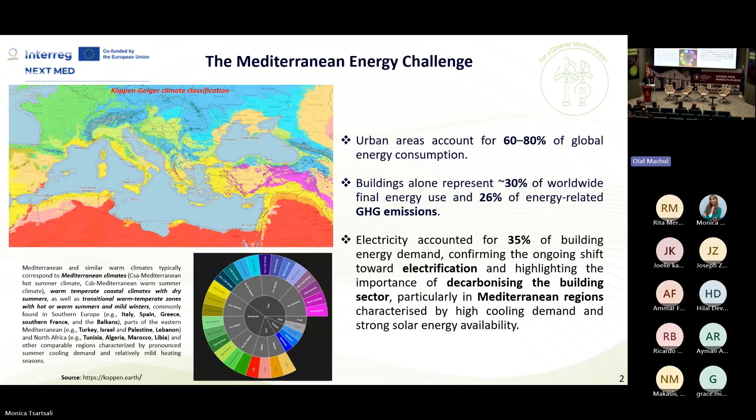The challenge that Shadi told us before of the European Union is to use the thermal energy that we have in particular countries, which are the ones with the climate, which is a Mediterranean climate. So we want to store this energy that usually in summer we cannot use because we have not the final request. You can see all the countries with hot summer, and so the possibility to use this heat.

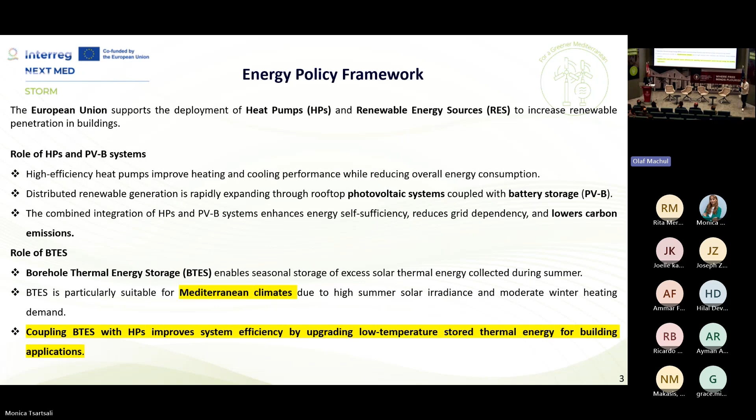So the idea of the European Union, the challenge, is also to couple two kinds of systems, the Borehole thermal energy system, also with heat pump, in order to have a polygeneration system, maybe which can reach a standalone system, a renewable energy system. This is the idea of our project, of our pilot.

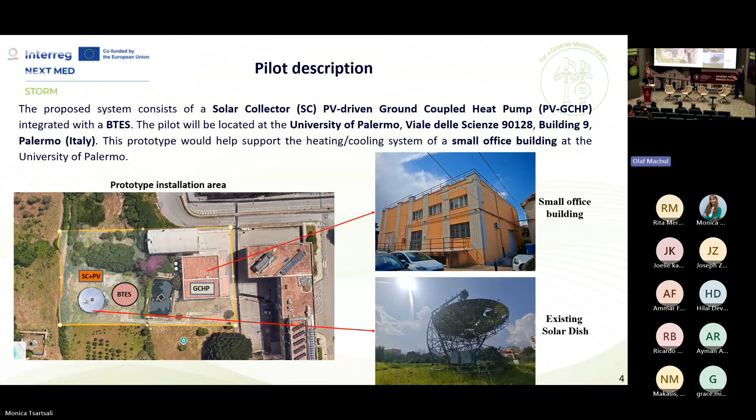Just have an idea of our plant. First of all, we have the solar collector, and we will see later exactly the shape, the kind of solar collector. Then we have a first thermal storage, which is outside of the soil, which we need to decouple the thermal storage from the Borehole thermal energy storage.

Then we have the Borehole thermal energy storage, a system with a depth of about 15 meters. It's different from Beirut because we don't want to reach the aquifer. We studied the soil of the University of Palermo, and we cannot go over 15 meters.

Then we have the heat pump. It's a water-to-water heat pump. It's hybrid because on the primary side we can work with water and also with air, because we have better conditions using air in summer in terms of COP of our heat pump. Then we have another thermal energy storage, an external thermal energy storage. Also this one is used to decouple the heat pump from the building, and then we have the building.

The setup of the building, we want to reach a temperature of 20 degrees in winter, about 25 degrees in summer. And the idea is to reach about 45 degrees for water which goes to the heat pump, which goes to the Borehole thermal energy storage, and about 7 degrees for the cooling system.

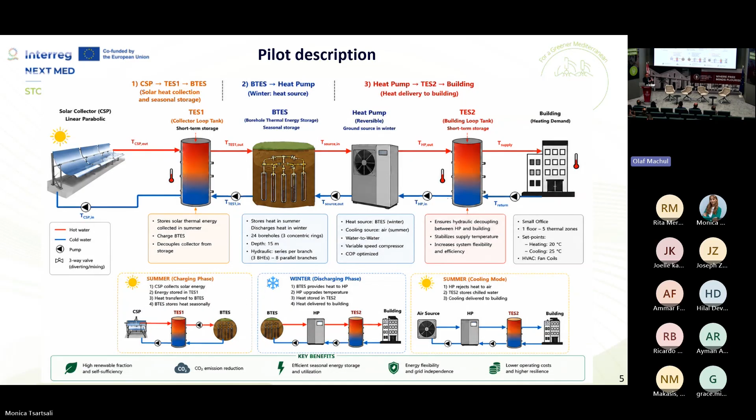Then in summer I use the heat pump to cover the final user's cooling demand, using another heat exchanger, because I want to exchange with air, since the air temperature outside is better than the water which comes out from the Borehole thermal energy storage. So this is the main idea of the management of this pilot.

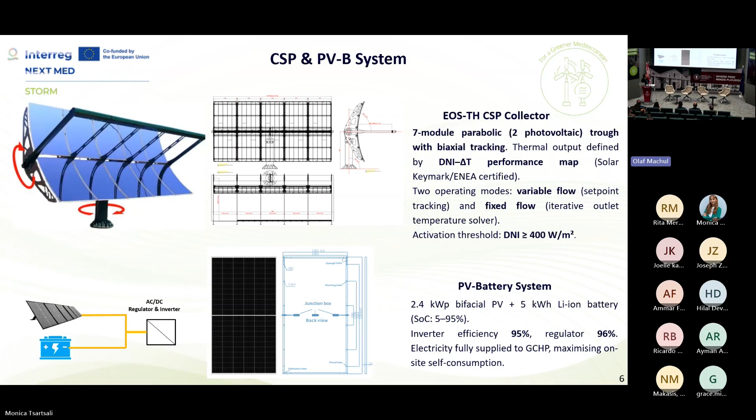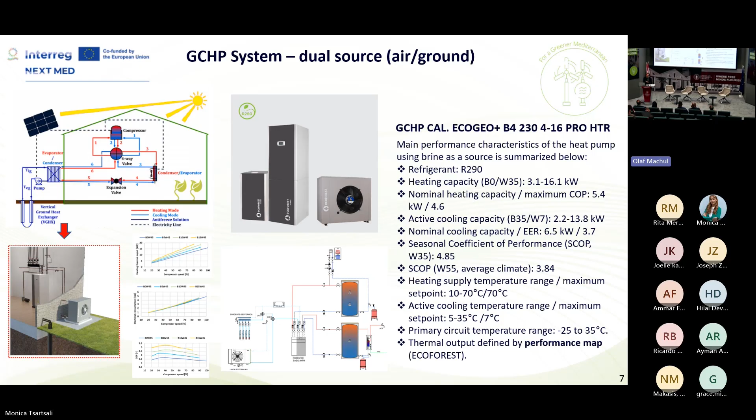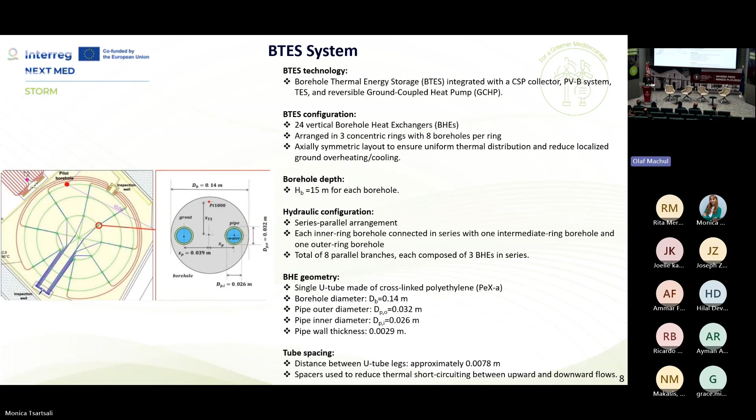Okay, this is the Borehole shape. All of us discussed about the hexagon shape. We have already realized one Borehole thermal energy storage at the University of Palermo. It's very similar, 15 meters deep, and we also studied it for 2 years. So for this technology, we are sure to have no surprises in these terms.

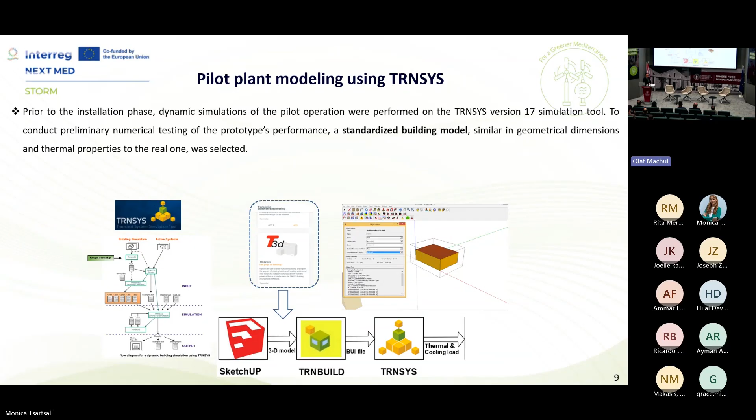Okay, we also used TRNSYS for the simulation of models. Also, Antonio Rosato from Naples and Giovanni Ciampi gave us a hand in this field. And this is the building that we study.

First of all, we study a standard building, which is very similar to our building, because the idea is to study exactly our building in the next research scholarship. The girl who won will study exactly our building, but it's very similar.

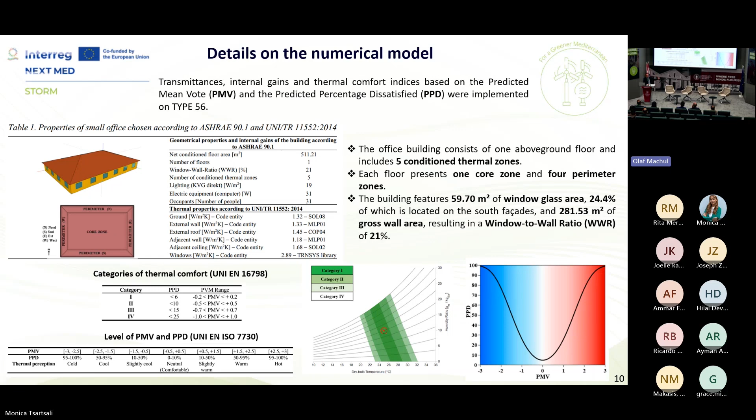We divided it into 5 zones. 4 are on the perimeter zone and 1 in the center, the core zone. And you can see the condition of windows and walls is very similar to buildings in Sicily for office use, very similar, as I told you, to our laboratory, our acoustic laboratory.

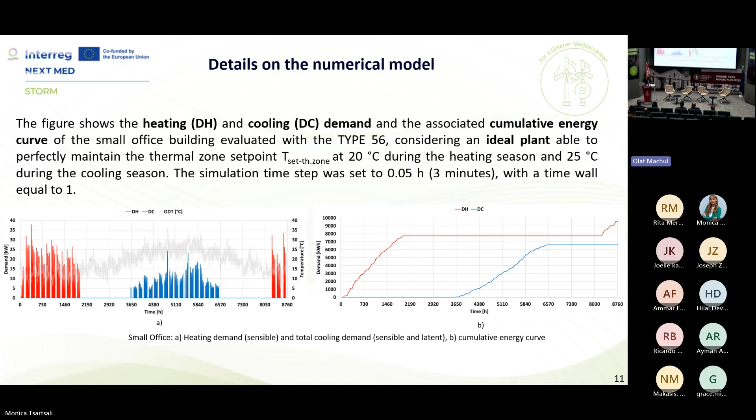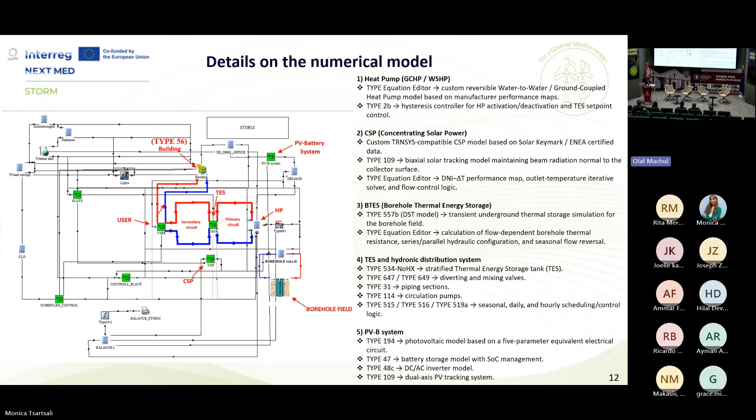Okay, let's go very quickly to the TRNSYS model. These are the different types that we put inside with all the systems, the Borehole thermal energy storage, the solar collector, and so on. Okay, just have an idea of the parameters that we study for each system.

We use for the solar collector the direct normal irradiance in Sicily, and we use the Meteonorm system in order to have a direct normal irradiance, and also the different temperature between the mirrors, the temperature on the mirrors, and the temperature of the air, which is very close to the mirror.

Then we have also a battery in order to store electricity, which is enough to cover the heat pump on some days. Then we have the heat pump.

The heat pump, we focus attention on the speed of the compressor and also two different temperatures, the temperature of source and the temperature of the water which comes out from the borehole. The temperature of source, which can be also the temperature of the external air in summer, when I prefer to use it in order to increase the COP of the heat pump.

Then we have the storage tank. I told you about the level of temperature of 45 degrees when we want to charge the Borehole thermal energy storage, and also the cooling temperature of about 7 degrees when the water goes inside the borehole, and then the condition of the building of the small office.

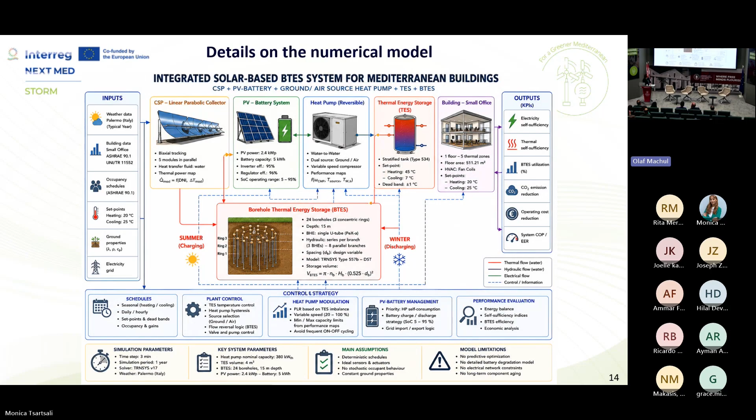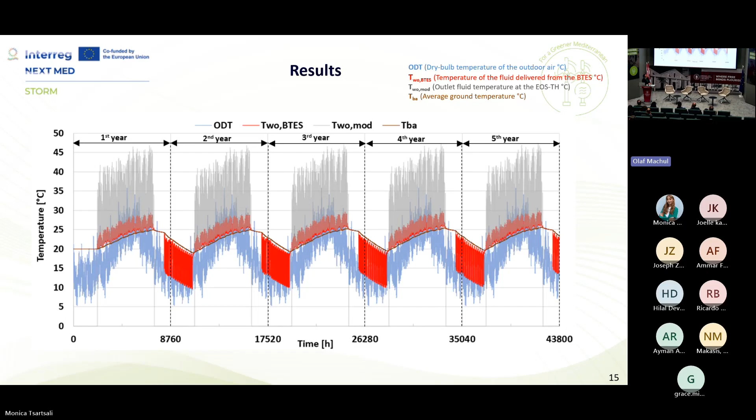So we wanted to continue the model with TRNSYS, our study, our management, in order to shift up this curve. Some information that I've already covered: we have the phase of discharging from December to March. We have the phase from April to October to charge. This is usual for everybody.

Important information: the thermal energy we collect inside the Borehole thermal energy storage is about 15,000 kilowatt-hours per year. Our Borehole thermal energy storage cubic volume is about 1,300. I saw that yours is about 1,600 more or less, but you have 100 square meters of solar collector.

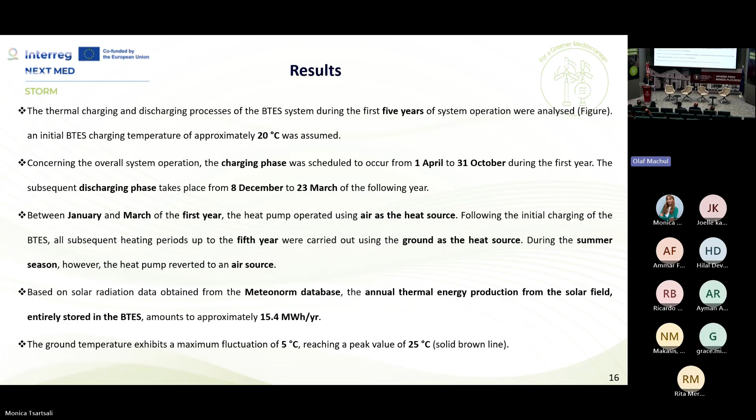Our solar collector is only about 26 square meters, much smaller, because I have to use money to cover the solar collector, heat pump, battery—this is the first pilot. You told before, this is a pilot, okay? We study, then we want to implement maybe for industry, okay?

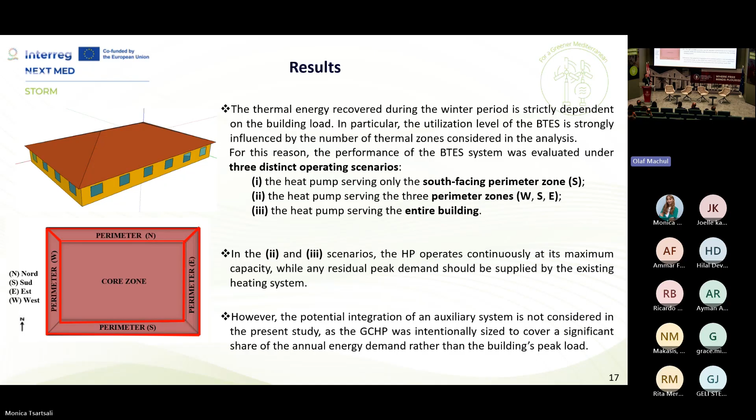This is the result, and it's important to underline that we referred only to one zone, and the result is for only one zone. We'll see that we use the Borehole thermal energy storage better if I cover all the building. So we'll see three scenarios: the first related only to this zone, the second with three thermal zones, and the last for all the building we're simulating.

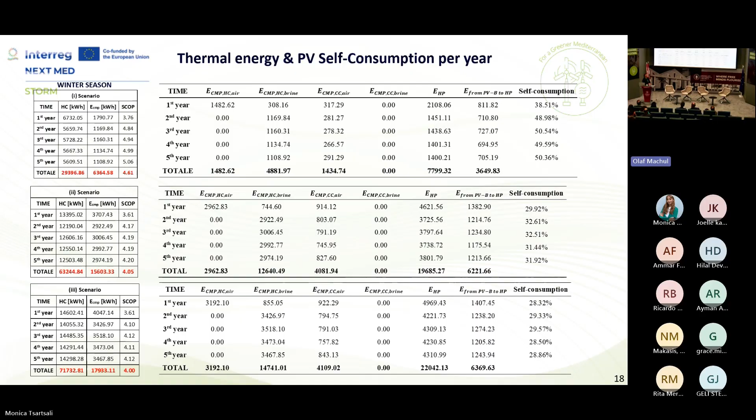This is a simulation we've done maybe last night in order to see the thermal energy we recovered, and the electricity that we use from the photovoltaic system in order to supply the heat pump.

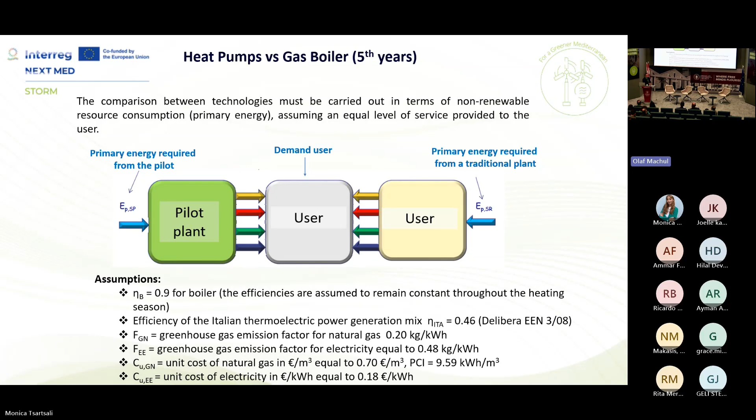We will also make a comparison between our, we can say, trigeneration system, with a traditional one, to cover the same demand of the final building. So you can see the kilowatt-hours of energy saving compared to the traditional one, and also the cost saving.

The cost savings are very small at the moment, maybe because we have to shift up and go on with simulation, but it's important to underline that we can have some energy saving. We also did this for the first scenario, for the second with three thermal zones, and the last with all the zones.

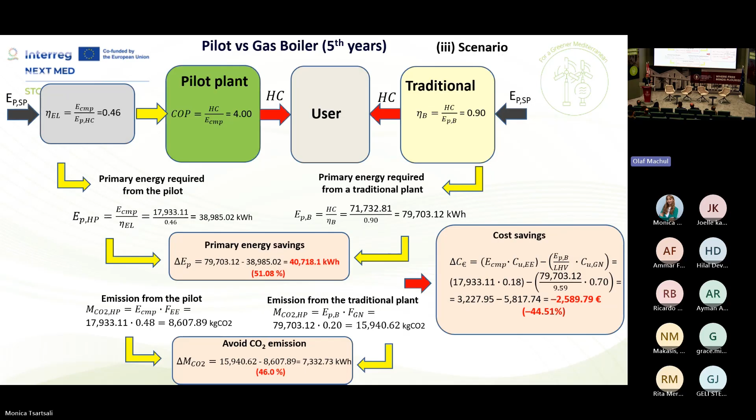I want to show you other results in terms of energy that we recover from the Borehole thermal energy storage. This is the same as I said before, with the comparison to the traditional one.

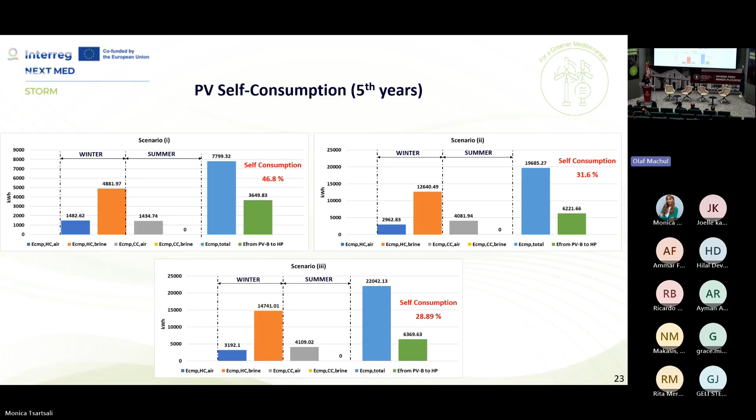Just have a look at the thermal energy we recovered. If we cover the supply and demand of only one zone, about 140 square meters—the total building is 500 square meters—we recover only 30% of the thermal energy from the Borehole. But if we increase the square meters to supply, we go up to 72% of thermal energy.

But the temperature that we reach in the building is a little lower than the normal thermal hygrometric condition. Still, we use 70% of the thermal energy in the Borehole, and the same applies.

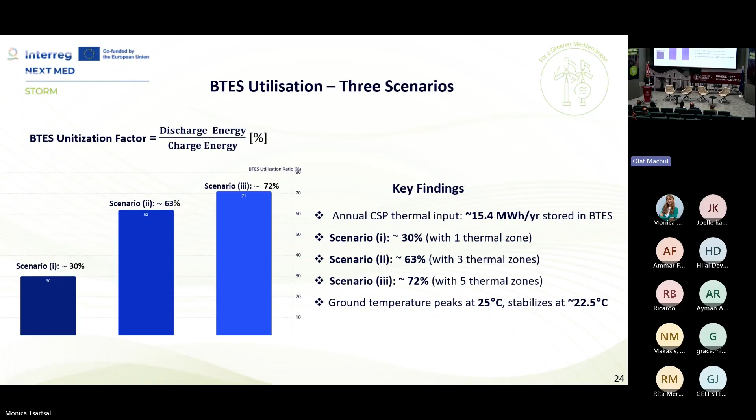At the same time, the heat pump electricity demand increases, because I have to use the heat pump more, and so the self-consumption is reduced. It's natural, but I'm able also to reduce it.

You have to pay attention that the thermal collector has only 4 photovoltaic panels of 500 watts, and I can increase the efficiency by about 20% because of solar tracking, so they become 600 watts each. 2.4 kilowatts total, which is very small.

If I suppose maybe to put 2 solar collectors with photovoltaic panels, I can increase this level. Okay, also another piece of information.

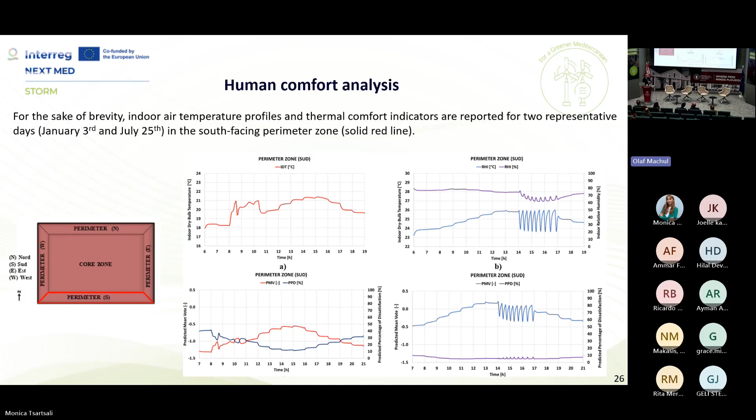The other parameter is the percentage of people not satisfied, and this value cannot go over 10%. So if people over 10% are not happy... but this value is also respected. So with one zone, I am sure the conditions are good for the people who stay inside the building. So, our conclusion—I have already told you.

The idea is to shift up this result. We want to increase the temperature inside the Borehole. We also saw in the other Borehole we already built at the University of Palermo that the temperature is about 38 to 40 degrees for 5 years, and we are sure of this one.

So we can also play with the flow rate. Maybe we can increase the flow rate of water in order to have a temperature very close to 35 degrees, and not use the heat pump so much if I get very close to 35 degrees.

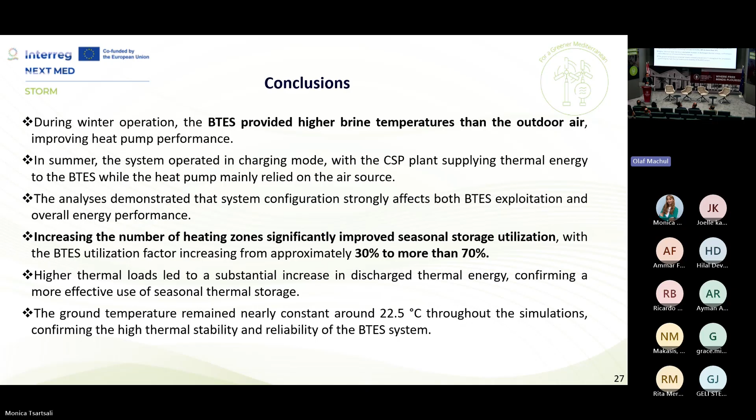So we have to manage this system, which is a very particular trigeneration system. It's important to simulate different conditions, and then once realized, try it on our pilot.

For future remarks, we want to maybe use an additional Borehole, to also have cooling energy—one for cooling and one for thermal energy. But that's maybe for the next project with Shadi and all of us.